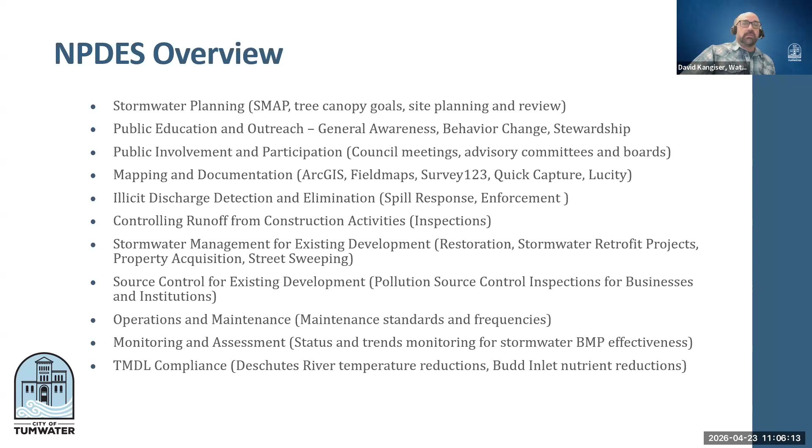Monitoring and assessment, that's a requirement that looks at status and trends for our stormwater treatment and flow control effectiveness. We contribute to a fund that the state manages to fund some of these studies. We also have TMDL compliance pieces in our stormwater permit that include the Deschutes River temperature reduction and the Budd Inlet nutrient reductions, and I'll get into each one of these pieces in a little bit more detail as we go.

So with all these requirements, we have to coordinate throughout the city. Again, this is a citywide permit, and so it touches virtually every single department that we have in the city. So we have weekly meetings internally with our inspectors. We have our code enforcement meetings with community development, operations, and us. We do IDDE trainings annually, so spill response trainings for citywide staff.

David, yes, can you tell me what IDDE is?

Yes, IDDE is illicit discharge detection and elimination. So that's essentially spill response, and then we're actively looking for pollutants in our stormwater system before they discharge to the waters of the state. So it's a program that we have to maintain to respond to spills mainly.

Good question. There's a lot of acronyms too in stormwater world, so I apologize.

We love our acronyms, but yeah, I can explain some of those as we go along too. Here's another one, the SWPPP, the Stormwater Pollution Prevention Plan. We're required to have a stormwater pollution prevention plan for every facility that has equipment or chemicals. So that includes the operations and maintenance yard, the Tumwater Valley Golf Course, and the Parks Department building. So we do annual inspections there.

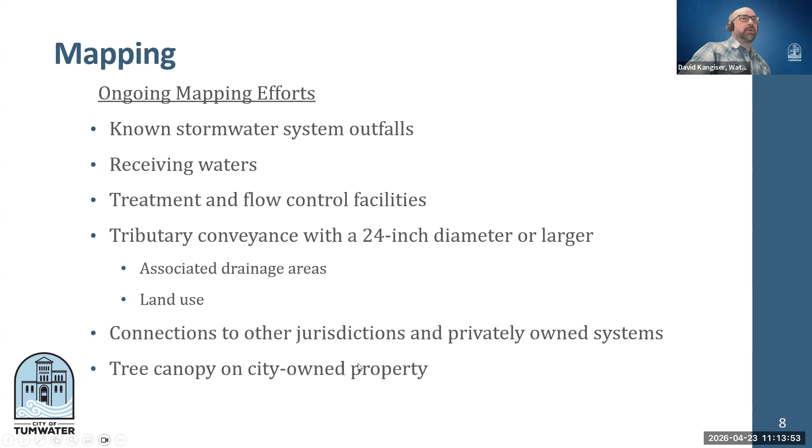And again, this is the illicit discharge detection and elimination system that we have, and it's designed to prohibit, prevent, and detect pollutants that are entering our stormwater system or have the potential to enter our stormwater system.

Part of that is to do a dry weather outfall screening, and so we go out in the summertime and we look at our outfalls to see if they're flowing. The thought is that if we're looking at them during dry weather when there's no rain coming and we see a flow coming out of the system, there's probably something going on that shouldn't be going on. So we source trace that upstream and find out what the discharge is coming from, and if there's some intervention that we need to take.

We're required to do 12% of that annually, and last year we did almost 15%, so above the minimum requirement. We also do trainings for the staff to recognize IDDEs and how to report them.

We also have a new permit requirement this year to coordinate with our fire departments to address PFAS containing AFFF, which is aqueous firefighting foams. Our fire department is required to have this since they're a first responder to the airport. And so Ecology wants to make sure that we are regulating that in a responsible manner.

David, yep, typically, where are the outfalls? Because I know they have maps here, but typically, where are they located? I mean, like in my cul-de-sac, they're the ones from the streets, but where are the main ones? I was just curious where they are - what you considered, which are the ones you monitor, and where are the big ones?

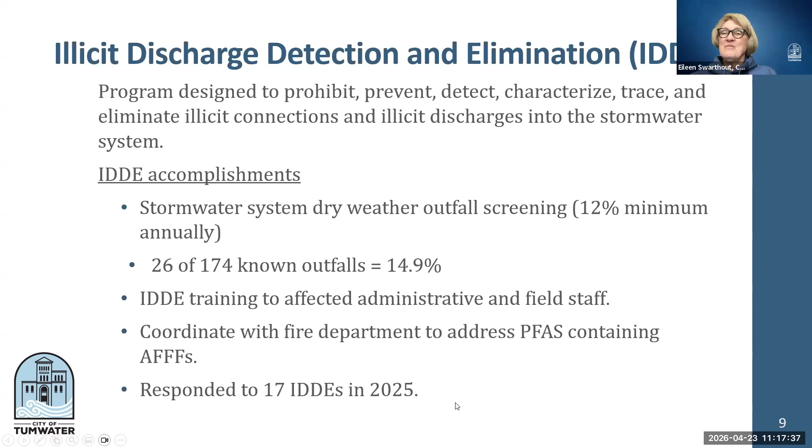Runoff control from construction sites - this is our inspection program, where we inspect for stormwater features on construction sites monthly, both public and private. Last year we did 76 site plans and visited 88 different construction sites, compared to 2024 when we only had 28. So last year was a fairly busy year.

We did issue one notice of violation for a turbid, sediment-laden discharge on Black Lake Boulevard. We're currently working with the property owner to correct that - they've hired an engineer to design stormwater treatment facilities to prevent that from happening in the future. It's looking like it's going to be a good outcome there.

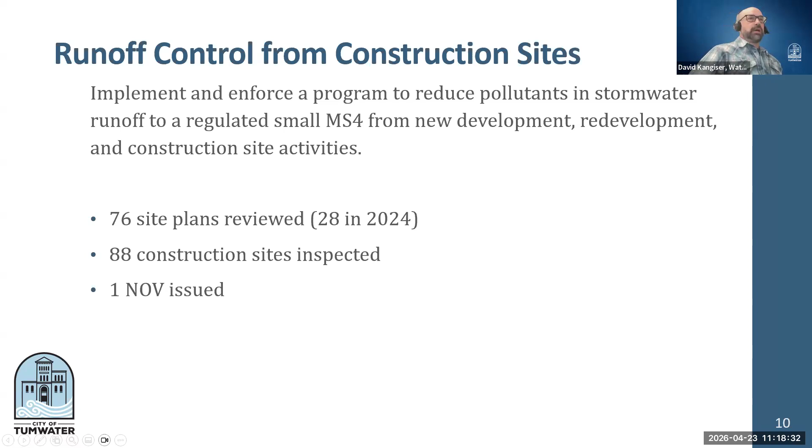So stormwater management for existing development - this is the new one I wanted to talk about. Ecology has recognized that a lot of infrastructure out there is aging and not up to today's standards. This permit requirement encourages jurisdictions to improve treatment facilities to get them up to today's standards, and we fall into that group. There's a lot of old infrastructure in Tumwater that needs to be improved, so we've got a few things in the pipeline to help achieve that.

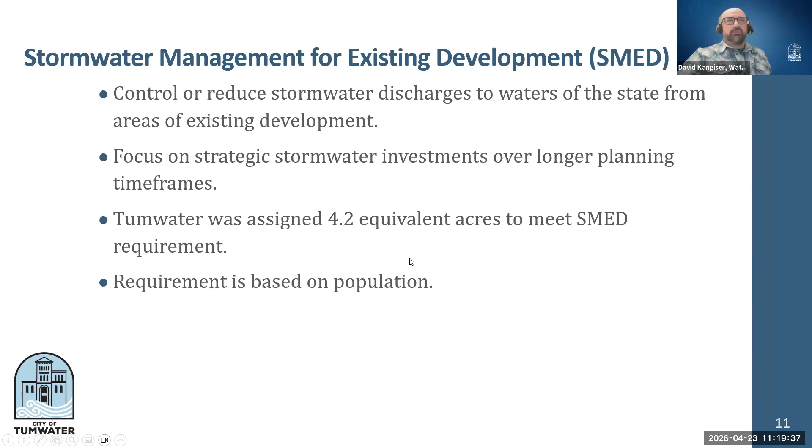The way they score this is on a point basis, called equivalent acres - 4.2 equivalent acres for us, based on population. A larger population base gets more equivalent acres assigned, a smaller one gets less. We're on the smaller side, so 4.2 is on the smaller side of equivalent acres assigned.

You meet this through stormwater facility retrofits, bringing things up to today's standards. You can also implement land management and development strategies, like SMAP - the Stormwater Management Action Plan we have in the Trosper Lake Subbasin, a smaller area of the city, where we do enhanced screening, operations and maintenance, source control, and education and outreach. You can also meet requirements by doing maintenance on projects that exceed $25,000 - we have several in the pipeline. You can acquire property, do restoration activities and projects, floodplain reconnection, impervious surface removal, and sweeping and line cleaning. Each of these has a different point system assigned, which makes it complicated to meet these requirements.

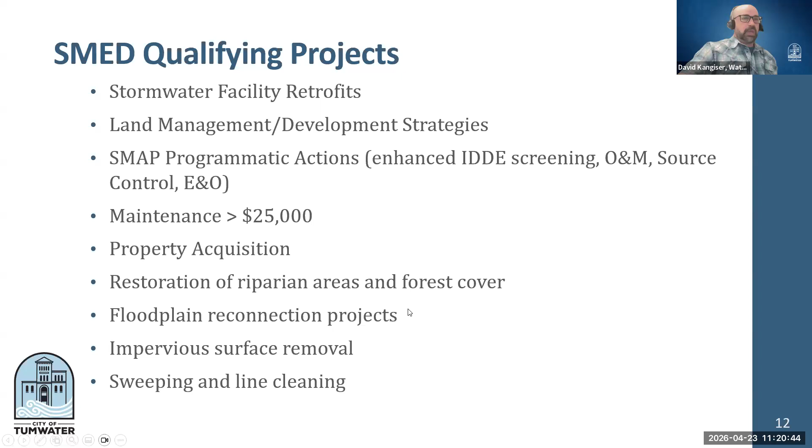Here are a couple examples of how we'll meet these requirements. We currently have a Beehive stormwater retrofit project I'm working on with Fuller Designs, approaching the 90% design phase - that's going to give us 51.64 equivalent acres, quite a bit more than the requirement, treating that area. We're also getting equivalent acreage from the Sapp Road Park restoration events Grant is doing on second Saturdays, and from the Pioneer Park Bank Stabilization Project. All said and done, we're going to be at 53.02.

And remember, our requirement is 4.2. So we're blowing it out of the water for our requirement, which is great. The good thing about this is we can achieve half of our goal for our next permit cycle. So if we're assigned 4.2 acres for next permit cycle, we can use half of this permit cycle's progress for the next permit cycle. So this is setting us up for essentially the next 10 years to meet this requirement.

Dave, how do we fund this? The Beehive project I'm working on right now is funded by an Ecology grant. For the construction phase of that project, I'm also going to be looking for Ecology money to help us out. Sapp Road Park, that's just a lot of sweat equity and volunteer work. And the Pioneer Park stabilization project, I believe that's an Ecology funded project as well.

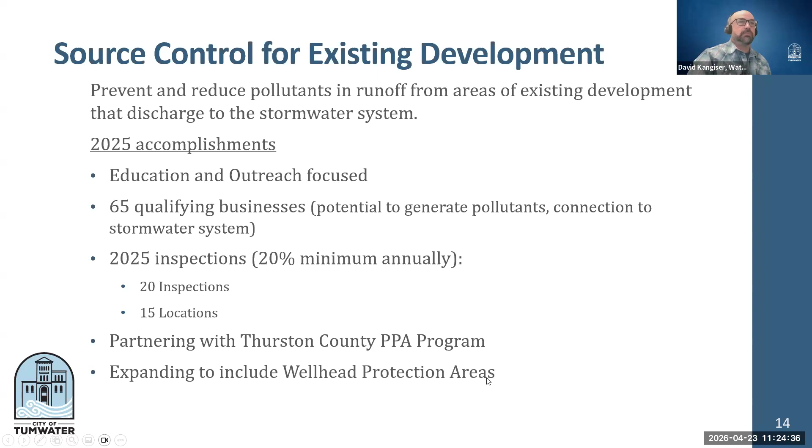Operations and maintenance — last year was a great year for operations and maintenance. Some of the accomplishments we had: we maintained 52 facilities out of the 92 known facilities that we have. That includes the ponds, swales, infiltration vaults, things like that.

And Councilmember Swarthout, this is what you're talking about, the catch basins. We inspected over 1,500 catch basins, almost 1,600, out of the nearly 4,000 catch basins that we have. Out of those, 672 were cleaned or repaired. And through that and our street sweeping activities, 775 tons of material was removed from the streets before it entered our stormwater system. So that's great.

And then we have several projects that exceed the $25,000 threshold as well that we're working through right now.

David, I have a question for it. Sure. For that 1,592 out of 3,778, are you required to hit a certain amount a quarter, a certain amount a year?

Yeah, absolutely. We're required to inspect all of our catch basins within 2 years, every 2 years, so that's essentially 50% a year as our target. And that's a tall ask for our operations and maintenance team.

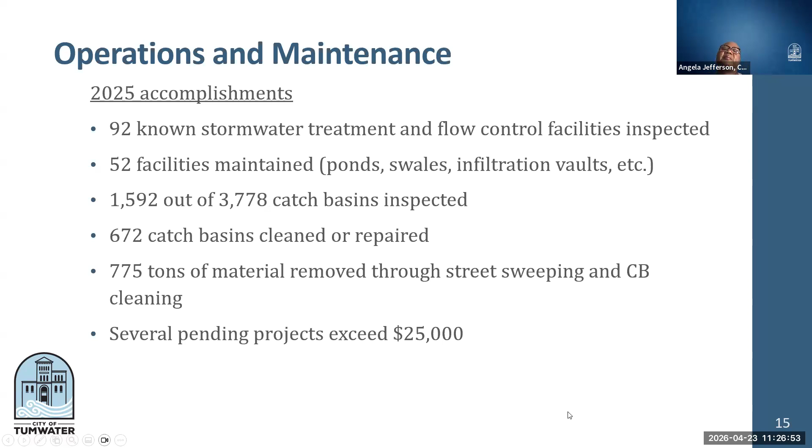And then the TMDLs, the total maximum daily loads. We have two that we're required to meet through our stormwater permit. The first one is the Deschutes watershed temperature reduction, so we're required to implement actions to try to reduce temperatures in the Deschutes River.

So we're actively doing that through the Pioneer Park Restoration Project. We're going to be doing some bank armoring and planting. There's some planting plans teed up for the Tumwater Valley Golf Course as part of their Salmon Safe certification. We finished a Serendipity fence removal project.

Serendipity is a daycare center down by Tumwater Valley Athletic Club. There was an old dilapidated fence that we removed from the stream bed and revegetated, so it's going to get some shade now. We've also done a couple of pop-up events at the Palermo wetlands down by our well fields, where we planted trees and stuff along the wetland edges.

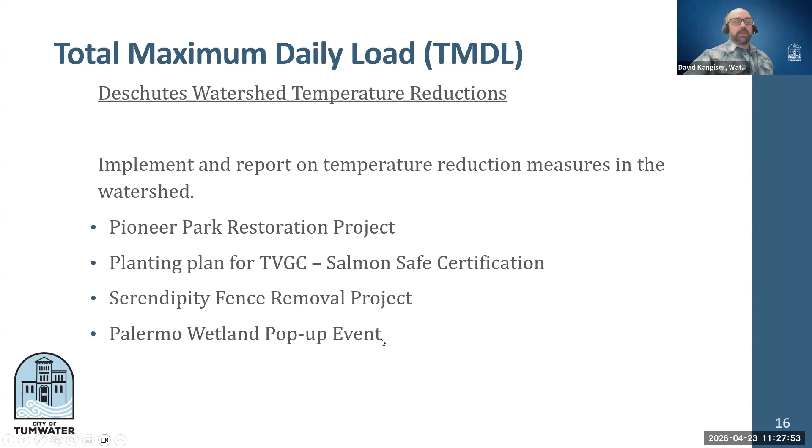We've also got the Budd Inlet nutrient reduction projects that we're supposed to be meeting as well. Again, I go back to that 775 tons of material that we've removed. That material contains nutrients, so we can point to that and say we've removed a lot of nutrients from the system just through our street sweeping and catch basin cleaning.

Again, that beehive project that I talked about, we're approaching 60% design completion, so that's also going to reduce nutrients. We're also working on a nutrient reduction enhanced maintenance plan, which is about 50% complete. We're working with Herrera on that, and that's essentially going to give us a roadmap for ways that we can get creative with our operations and maintenance teams to further reduce nutrients.

That's either going to be through enhanced street sweeping in strategic locations, or some education and outreach in strategic areas, like the Habitat at Home behavior change campaign we're going to be doing, to reduce fertilizers and pesticides that go into the stormwater system. So all those programs help us meet this goal through the nutrient enhanced maintenance plan.

And then we've also purchased a deep chine aerator for the Tumwater Valley Golf Course, and the idea there is to aerate the turf to allow water to get into the turf and the soil rather than sheet flowing off into the surface waters. That allows the nutrients to be absorbed into the plants and the turf rather than going straight into the water.

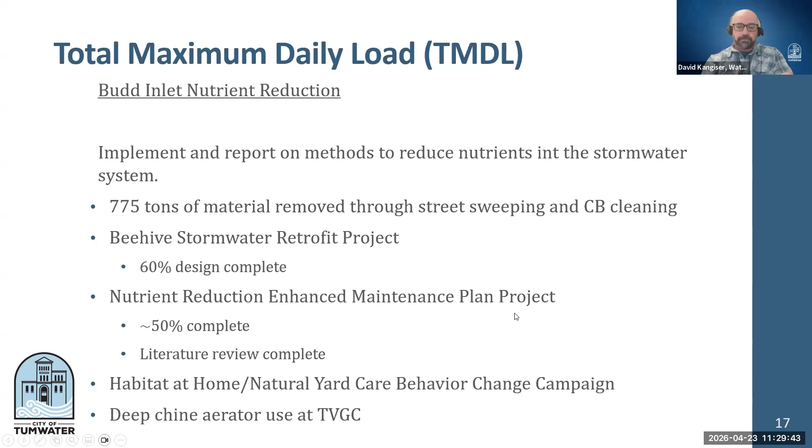So looking ahead, there's some big, tall tasks ahead of us for 2027. Some of those include the annual expenditures for the stormwater program and our TMDL program needing to get reported to the Department of Ecology. So they want to open the books and see where we're spending our money. They're going to want a capital projects list.

There's going to be a new SMAP requirement, that's the Stormwater Management Action Plan. When we created our first one for the Trosper Lake Subbasin, we actually created two more, so we're well set up for this one as well. We've already got two of them done that we can turn in.

We're going to have to refine the methods for identifying overburdened communities, so that's a new one as well. We currently have an equity index tool that we use. It could use some refinement, but we do have something in the works there.

Again, tree canopy mapping, that's an ongoing one that Alyssa and her group is working on. The stormwater system tributary basin assessment - we're going to be looking deeper into our larger stormwater system tributary areas and making sure there's treatment and source control and things like that going on. That's going to be like our Tumwater Valley Regional Stormwater Facility, things like that. A big one that we're going to be doing.

This is the Drainage Design and Erosion Control Manual update. That's essentially the standards set out by the Department of Ecology that our engineers use to design facilities and whatnot. That's about a 1,100-page document that we're going to need to be updating, and then any ordinance associated with that.

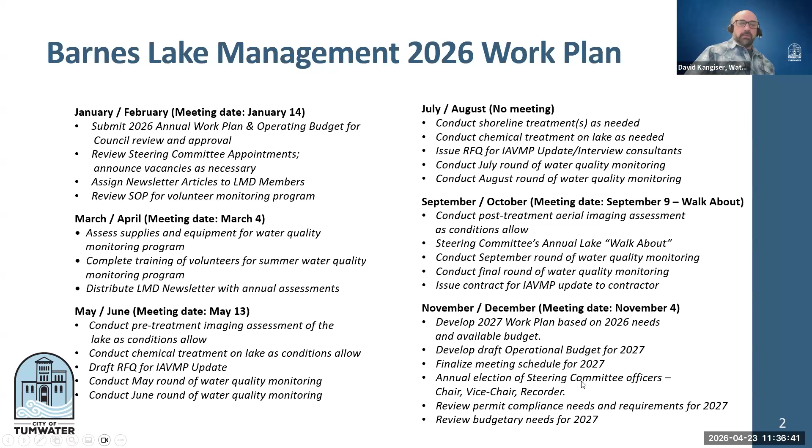So just to give you some updates on some of these tasks. This year we've brought on a new steering committee member, Troy Patience, with the Barnes Lake condominiums. That was our final vacancy for the steering committee, so that makes us a full team now. Like I said earlier, we just issued the newsletter along with our assessments and through our social media platforms as well, and we're gearing up to do our water quality monitoring.

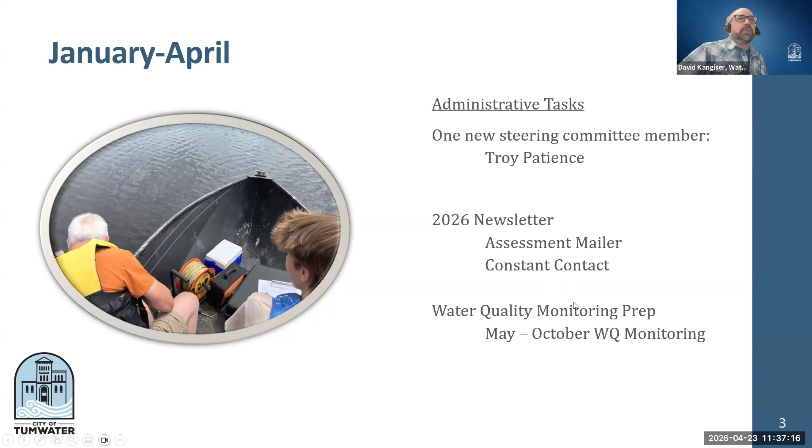This is an interesting graph. This is one of our Hobo data loggers that we have in the lake, and it takes a measurement every 6 hours, measuring water temperature and lake levels. What I've done with this graph here is show this flexible leveler, this green line - this is where we have that Beaver device set at, so that's the level it's set at. When we do get heavy rain events, it shouldn't exceed this level by too much.

You can see some of these rain events were major rain events and exceeded that barely a little bit. That bottom graph with the bar graph is actually rainfall data on a daily basis, so you can see how the lake level reacts to heavy rain events. It's kind of interesting - gives us a good gauge on the lake and if we can anticipate flooding and whatnot. You can see last year was a very dry year, lake levels got extremely low, historically low compared to some of the years past. So some cool tools we're using out there to capture that data.

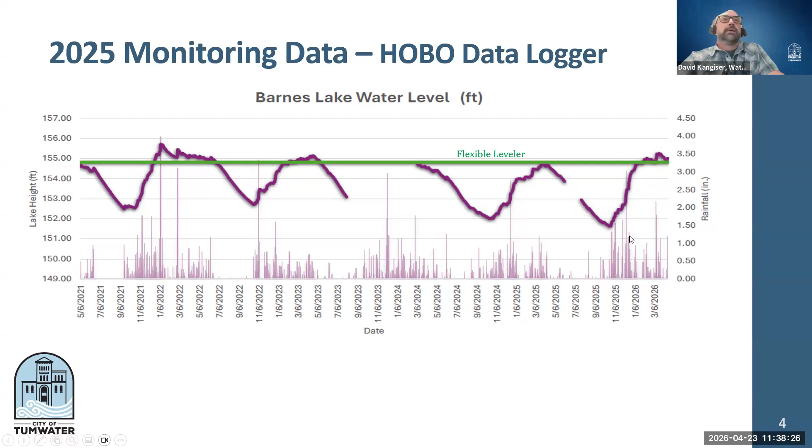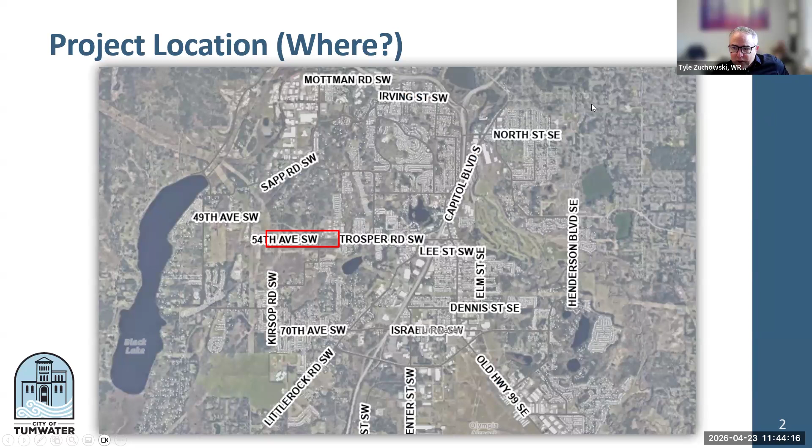Just to orient you on where the project is, hopefully you know where Trosper Road is. Currently, the sewer extends west along Trosper to Lambskin and then heads north to service the Trosper Ridge community. The proposed project will extend sewer west along Trosper Road.

The primary driver for the project is water quality enhancement. Percival Creek, for which the Trosper drainage area is a tributary, has been identified as a hot spot for fecal coliform as well as total nitrogen. That was identified and documented in the total maximum daily load assessments, both for the Deschutes River, Percival Creek, and Black Lake Ditch completed in 2018, as well as the Budd Inlet TMDL in 2022.

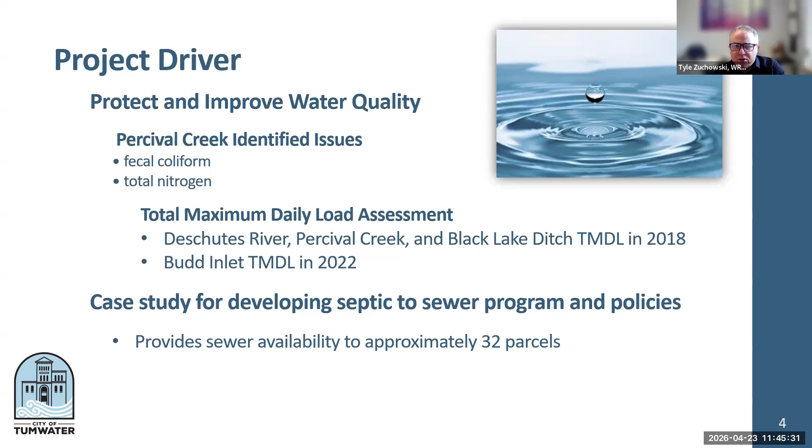This also provides an opportunity for a case study in the development of the city's specific septic to sewer program, helping develop those policies, which we'll share with council as we progress. This particular project provides sewer to approximately 32 parcels along there.

This portion implements an identified expansion of the sewer system that was included in the general sewer plan. It was also identified in the urban septic assessment report, a collaborative exercise with the county and the three jurisdictions—Lacey, Olympia, and Tumwater—evaluating regional impacts from septic systems. The Lambskin area was identified as a case study in that report, so we'll be looking to add that along.

Lambskin, or the Beehive industrial area, was developed in the 80s and 90s, and without sewer available, they had septic systems as well as sewage holding tanks, and there have been some documented issues with those.

I'll add that the city has secured and is negotiating with Gray & Osborne, an engineering firm, to complete the design. As part of the initial effort, we'll be revisiting some of those assumptions in the general sewer plan to ensure any proposed project aligns with longer range planning for sewage coverage in the area. We also have Carollo Engineering under contract to update the overall general sewer plan, and those two activities will be closely coordinated.

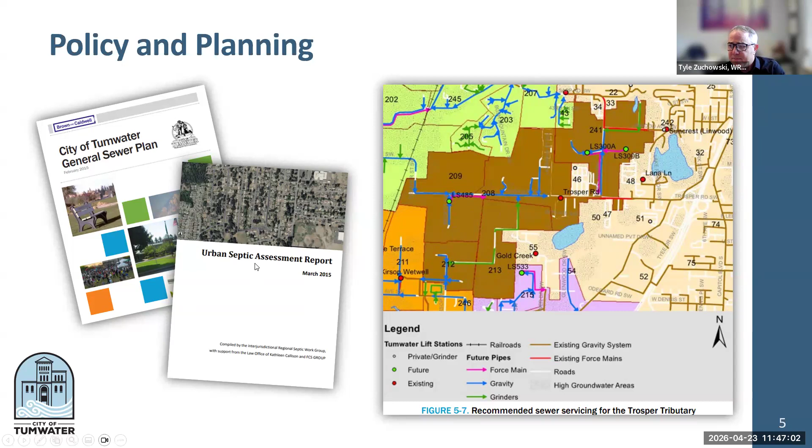As far as funding, we were successful in securing a low interest loan through the Water Quality State Revolving Fund administered by the Department of Ecology. They had 155 projects in 2025, and we were ranked 32nd among all of those. The loan amount for the project is $5.25 million at an interest rate of 2.7% with a term of 30 years.

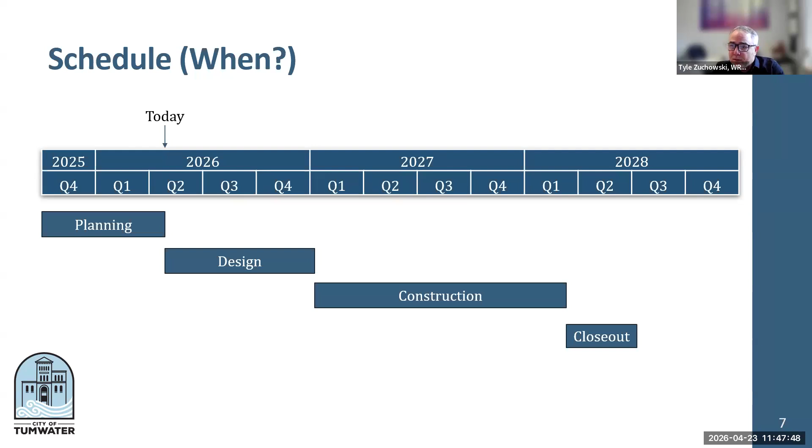We hope to complete the design by the end of 2026, with construction hopefully wrapping up in the first or early quarter of 2028. And so with that, we were requesting the committee to recommend placing resolution R2026-005 onto the consent calendar for consideration by the council.

Any questions? Yes, Tyle. Angela: Just for my knowledge, so now we're extending the sewer line, right? That means that no one is using the sewer for now, so this is just for new buildings going up, new homes going up. So the sewer line will provide the availability for existing residents and businesses that are along the pathway to connect up to the system.

As a side note, we're also looking to update our sewer code that addresses when a resident or business's septic system fails, the requirements that they must connect up to the system. But it also provides the ability for future growth to accommodate people and businesses moving into the area and developing, so that the sewer will be available.

Okay, so a lot of them are on septic now. Correct, in the Beehive area, as well as other residents along Trosper Road, are currently all on septic. All right, excellent. Now, do the majority of them want this, or are they happy with their septic? Does that matter? I would imagine that if their septic is working properly, they would probably prefer to stay on it. However, if their septic failed and they were opposed to replacing it, I'd imagine they would be very grateful that the sewer system was available to them. All right, thanks, Tyle. This was just for my education. Sure, absolutely, thank you.

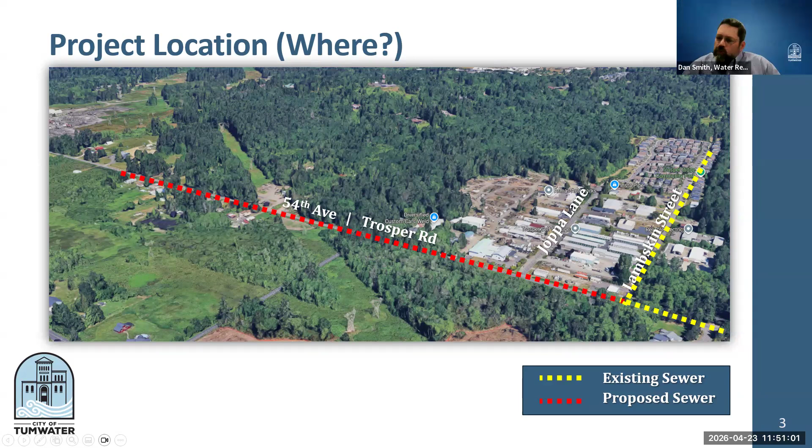I'm not exactly sure, maybe Dan has some insight on that. Yeah, so along that existing line on Lambskin, I think there might be one or two that have converted over when that line went in. But as Tyle said, when their systems fail, if sewer's not available, the county would allow them to just replace the system. And really, in an urban area, urban density, we want folks to be utilizing the public utilities and services we can provide, because it protects the groundwater to a higher level.

And so with this project, we would also be trying to extend up Joppa Lane there, capturing some of the businesses there. Because of the groundwater table and the geology underneath those sites, a lot of those are on tanks, and they have to be pumped regularly. They're not even really being treated to any kind of level other than what gets pumped out of there.

This is a complex project, and it's one of the reasons why we haven't seen developers extend this down. So this is really a great opportunity for us to kind of act as a developer in a sense, to move this line across some of the more challenging areas. We anticipate a number of those systems are aging and are probably within so many years of failure, so we want to make sure we have services available for folks that they can convert to. As Tyle mentioned earlier, part of that incentive package right now offers early adopters, so to speak, for conversions.

We have discounts on some of the permitting costs for that conversion. We'd be looking at providing similar opportunities for properties that exist here for those conversions, as well as looking at some of our other policies around connections and how we continue to fund a program as we look at extending sewer to areas that are already developed within and around the city, similar to what we've done with Welcoming Mobile Home Park recently, extending down into that same program area.

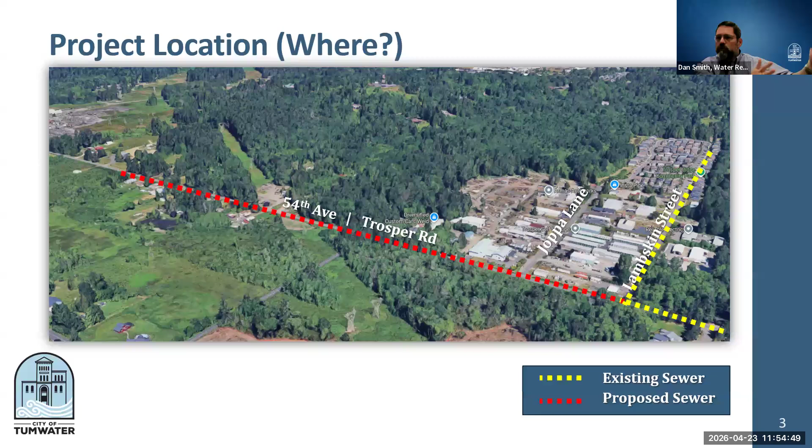Yeah, but this is also something that's not only good—I just was wondering, this is a different vehicle. Yeah, this will also serve new development that comes on. By extending the payment for the work out 30 years, that helps the paradigm of growth paying for growth. Right, exactly. It was just a new vehicle, because typically I don't remember us doing a loan before. Usually, this is an awesome opportunity, so to be able to get this.

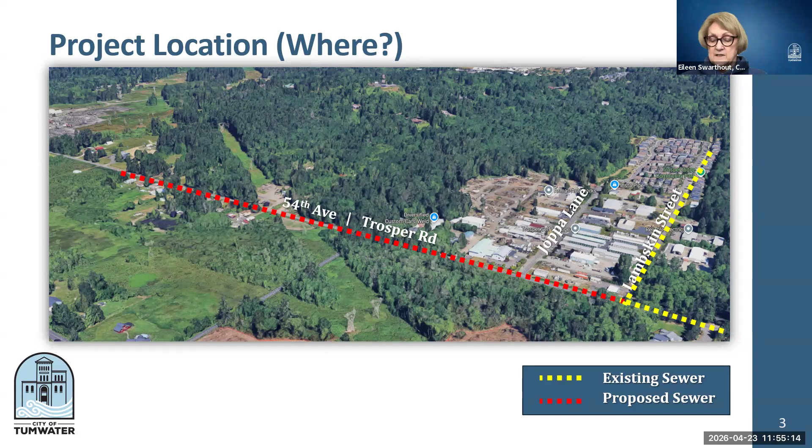Okay, I think those are the questions that I had. So this is really good. All right, okay, outstanding.

With that, we have a recommended action to place Resolution Number R2026-005, receipt authority for the water quality combined financial assistance agreement with the Department of Ecology for the Trosper Sewer Extension Project, on the May 5th 2026 City Council consent calendar with a recommendation to adopt. So moved. I second. All in favor say aye. Aye. Aye. The motion passes.

Are there any additional and future items to discuss? I do have one—I would like some feedback on the Arbor Day activities: how did everything go, total number of attendees, total number of giveaways, work done, etc.

I will have to get back to you on that. That would be a great question for Alyssa—she and Brian kind of spearheaded some of those activities, as well as Chuck in our Parks Department. So let me get with her. I was actually out of town at a conference, and maybe Kelly's got some info for you. I just wanted to volunteer to work with Dan and Alyssa and the team and put some information in the Friday city administrator's message, and some feedback to the community. That's a positive thing, and I also want to highlight the work that we are doing—that's a part of that also. So those are our additional items.